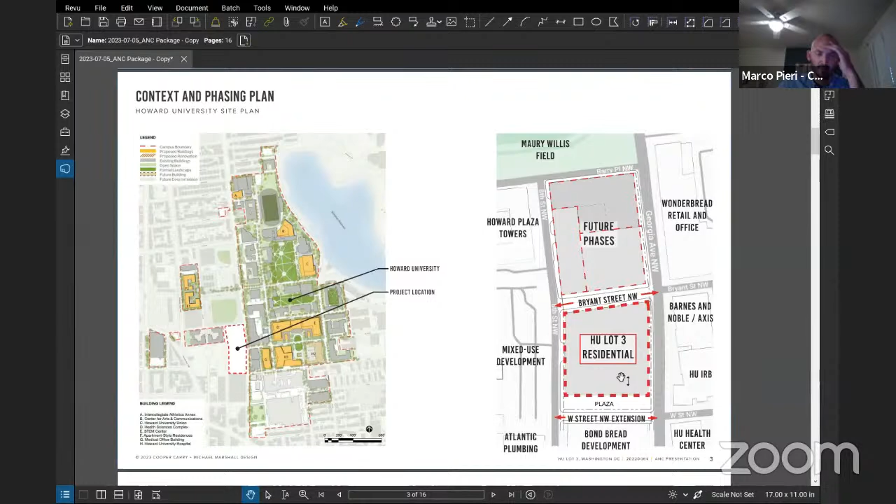At the center of the site, the Bond Bread development is going to be creating a W Street extension from the east to the west. Just to the left there's another planned development, and across the street we have Barnes and Noble, the Axis Dormitory, Howard University Interdisciplinary Research Building, and to the north, future phases.

Jumping to the next slide, I wanted to start with describing the building overall. This is a view from the southeast corner of the site, from Georgia Avenue looking to the northwest. You can see here there's no porosity, no connection through at W Street.

It's currently a large Howard University parking lot. What we're proposing is an 11-story residential building with 11 stories above grade, 2 levels below grade for underground parking. On the ground floor it's primarily retail uses with residential lobby, loading dock access, parking garage access, and other egress pathways.

The same slide, shifting to the rendering at the southeast corner. This is just showing the park or plaza that's going to be a private plaza on our property, but it will be open to the public at the south edge of the site. W Street will be running from left to right in front of you here. This shows you the overall massing of the building.

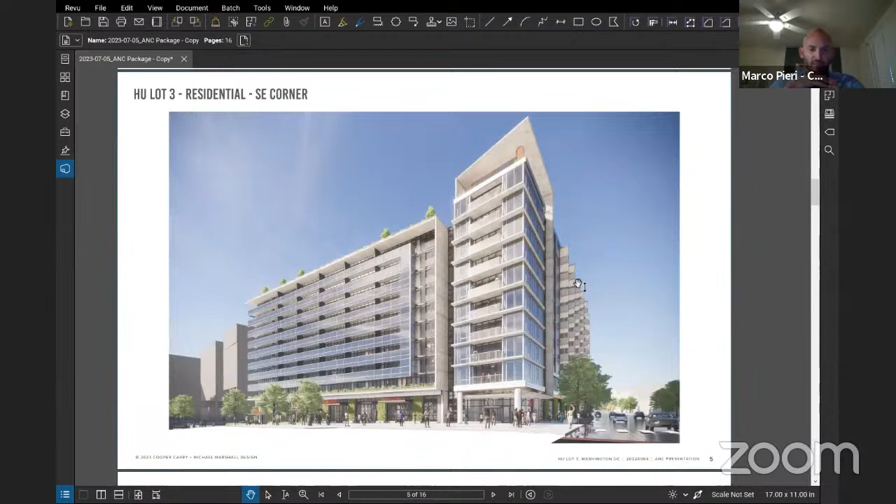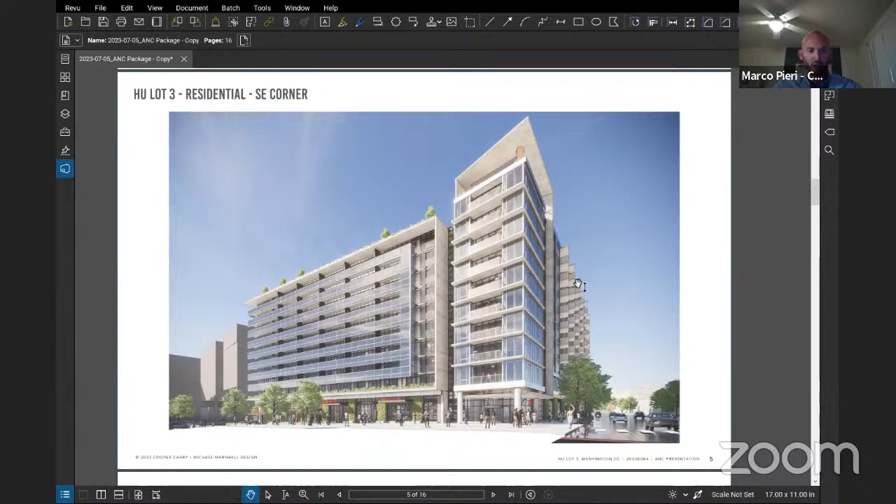We're really focusing a lot on the pedestrian realm and creating a lively, energetic ground plane with a lot of porosity and movement that we're trying to accommodate, as well as spaces for people to gather and meet.

I'm highlighting the bottom right because we're actually bringing some retail and residential lobby together to activate the ground plane at the southeast corner of the site. We have at the plaza to the south a retail elevator that will take you down to the retail parking spaces at level P1.

As we move around the west edge of the site, in the blue arrow, the first one mid-block, you'll see this is a loading dock, internalized loading. We're proposing a curb cut here to accommodate trash, recycling, and move-in trucks, all able to turn in, turn around, and do all the unloading inside of the building.

Just north of that, you could see a curb cut for the 2 levels of underground parking. Some of those parking spaces will be for retail and/or for the public, as well as the remainder being for the residential building itself.

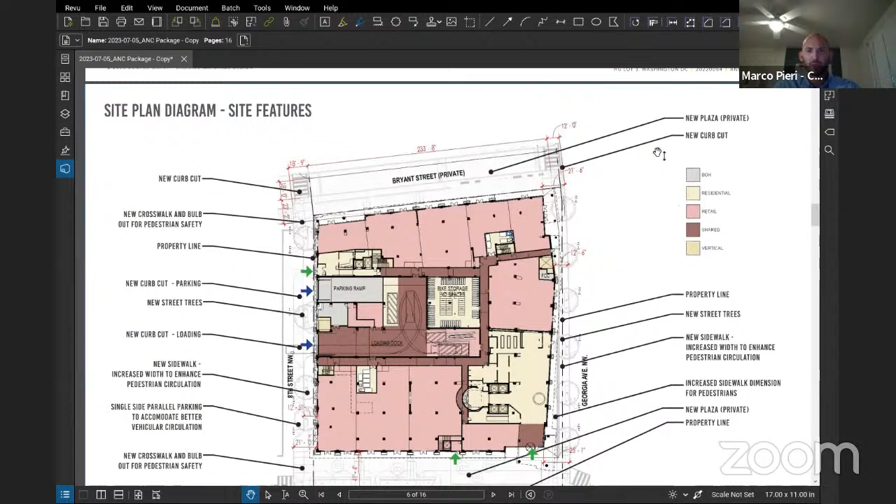Finally, one of the things we wanted to highlight is 8th Street Northwest currently has parallel parking on both sides of the street. We're proposing that the west side of the street would not have parallel parking, but it would be a two-way street with parallel parking, a few spaces on the right side adjacent to our site. Finally, curb cut at the northeast, as Layla described, connecting Bryant Street, and then at the northwest connecting Bryant Street on both sides.

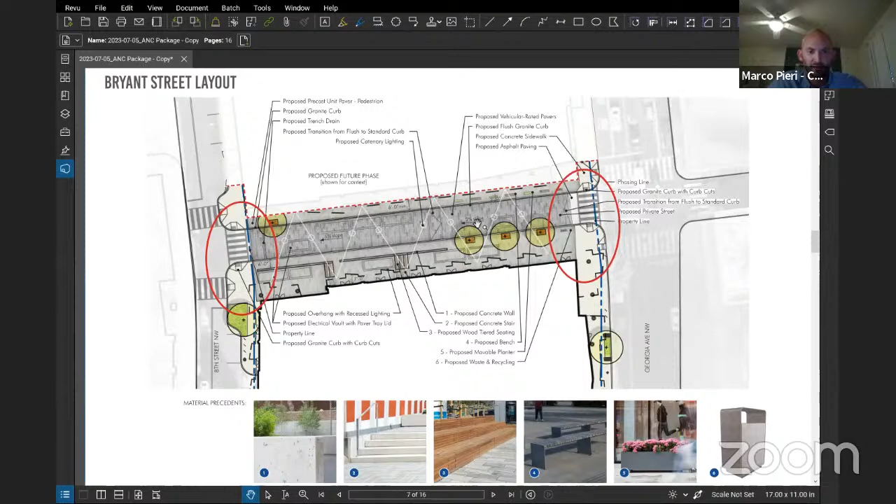Moving to the next slide, I'm just re-highlighting some of the things you've seen in our submission. These are some from the landscape architects showing the street paving patterns and those new crosswalks, as well as the actual street paving colors and design to a greater level of detail.

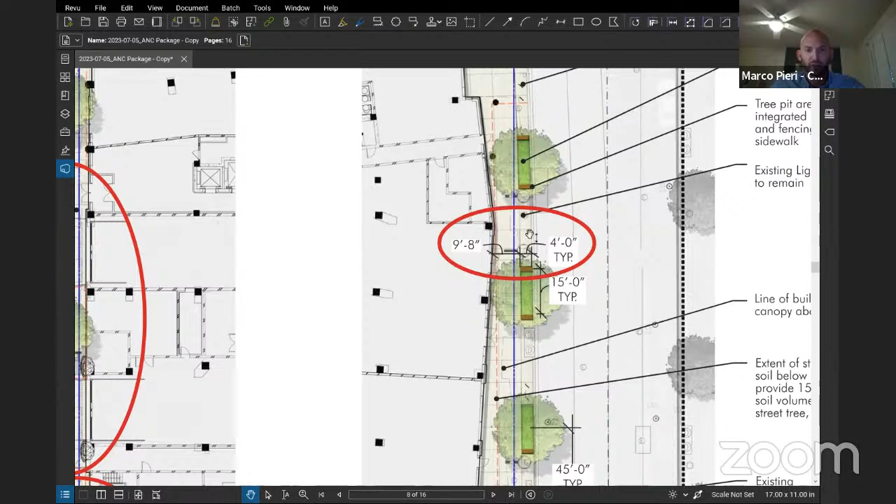As we move to 8th Street and Georgia Avenue Northwest, I just wanted to highlight the pinch point here, 9'8" width. It gets a little tighter right at that point, but it maintains 8 feet wide. Then it opens up to the north and the south along Georgia Avenue.

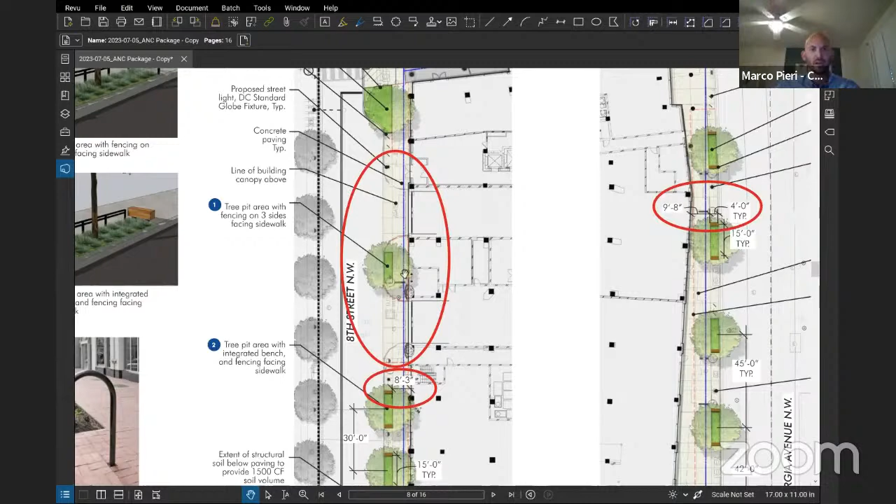Again here at 8th Street, you can see there is a continuation of curb so that as the pedestrian is crossing the loading dock and the parking ramp, they can kind of see and get to a place of safety. We didn't want to create too wide of a loading dock, but we wanted to continue that streetscape environment by having an additional tree and things like that, so it feels very vibrant. On the south edge of the site, here's again this bulb-out at the southwest corner, and at the southeast corner the crosswalk will be slightly adjusted to align with the future corner of the building.

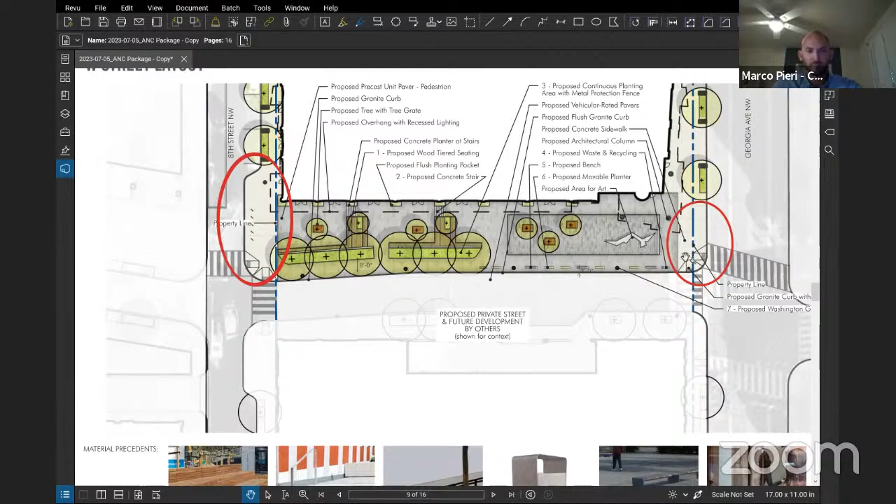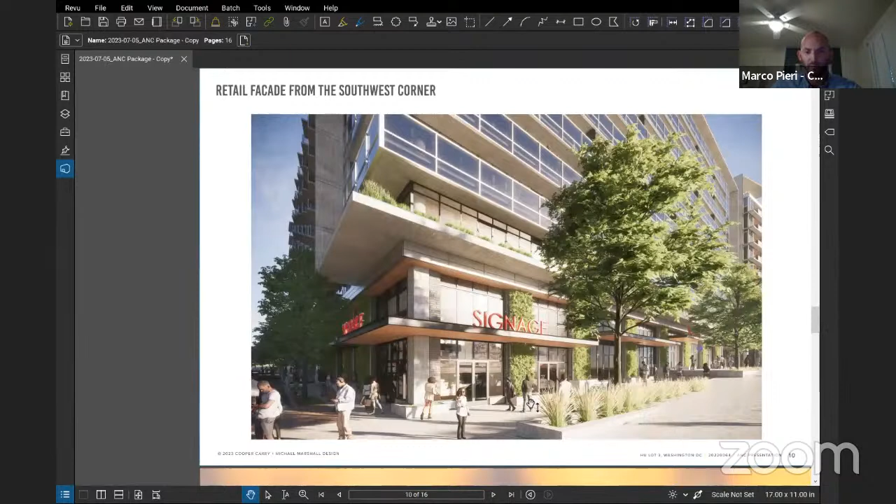Here's an example from the southwest corner of the site of some of the retail spaces and retail canopies, just to give you an idea of the vibrancy and some of the architecture and how it's going to relate to the public plaza in front of the south edge of the site. We wanted to keep a very vibrant space and really accommodate people to come and stay there multiple times of the day and evening.

So to jump towards the building exterior and projections, we also submitted an exhibit that showed all the projections along 8th Street Northwest as well as Georgia Avenue. I've highlighted a couple of the prime locations where we could show this on the exterior of the building. We'll start with 8th Street Northwest.

So along this edge, this is a typical level above looking downwards. You're seeing a couple of the balconies that do project beyond the property line along 8th Street and then onto the private property to the north. I've highlighted the depth at which those project outwards. At this northwest corner, there's a balcony at levels 3 through level 10 that's projecting approximately 3'6" out to the west over the sidewalk below.

Below that, at 12 feet above the grading, we have some retail canopies that are going to become signage band locations and canopies to protect people coming in and out from the elements at the retail zones. That canopy at a lower elevation projects out approximately 2'10". These balconies along the west side are a repeating angular form that mimics the architecture of the building and the angle that Georgia Avenue reorients itself on the east side of the site.

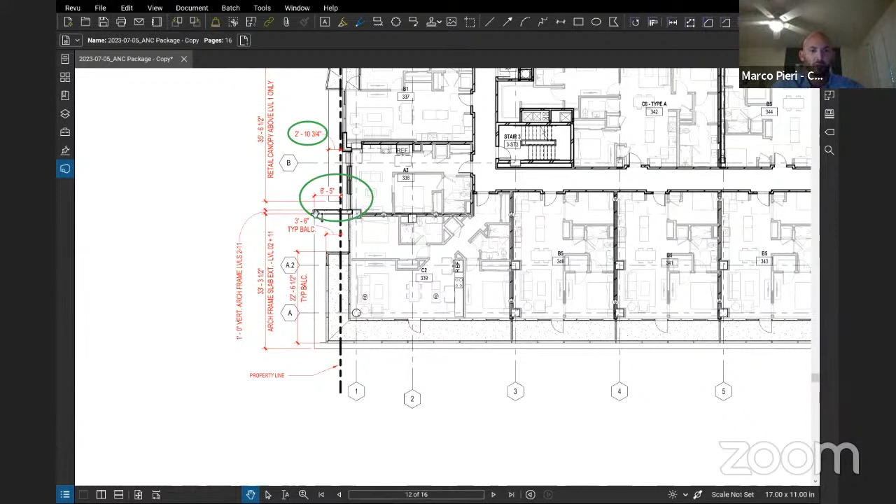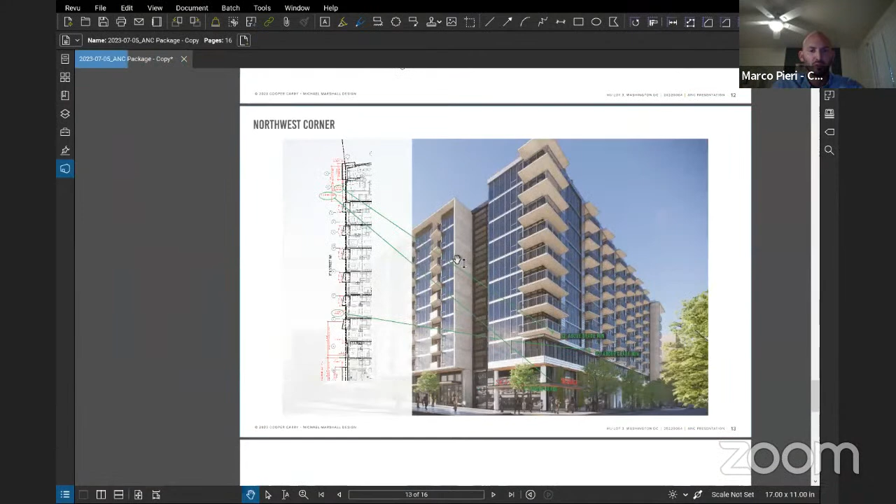I'm going to jump down to the next image, which begins to show you where those items are occurring. This is the northwest corner. You can see here the projection of 2'10" is this retail canopy below, occurring about 12 feet above grade. The corner balcony, projecting approximately 3'6", is 32 feet above grade, and it stacks all the way up from levels 3 through level 10.

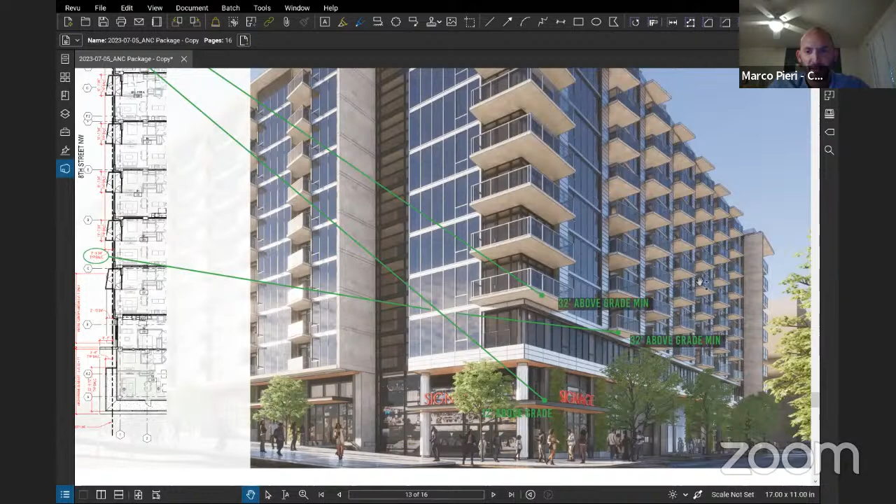The balconies to the south with the same angular articulation are also at approximately 32 feet above grade where the projections start. We tried keeping those higher so they don't impede on public space, but are more for building articulation. At the southwest corner, you can see the large concrete frame element I mentioned, intended to frame out the southern massing and create vertical bands and forms so this large building doesn't feel as massy.

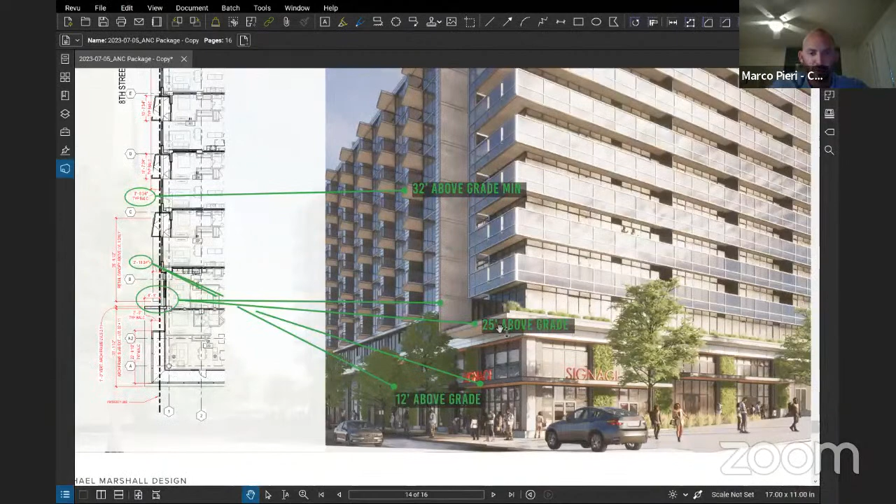This element projects out 6'10" at this horizontal plane, around 25 feet above grade. It runs vertical the height of the building all the way to the penthouse level, continuing that same profile as the horizontal plane down low.

The second zone, the 12-foot above grade canopy, projects out 2'10" beyond the property line, similar to the northwest corner of the building. Finally, we have our repeating balconies that project 3'6" across the property line, starting again at level 3. So that shows you both the northwest and southwest corners of the site.

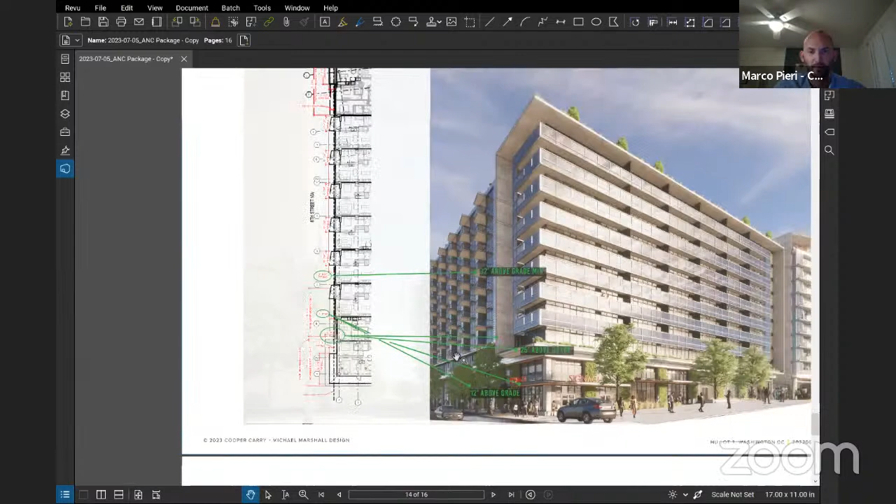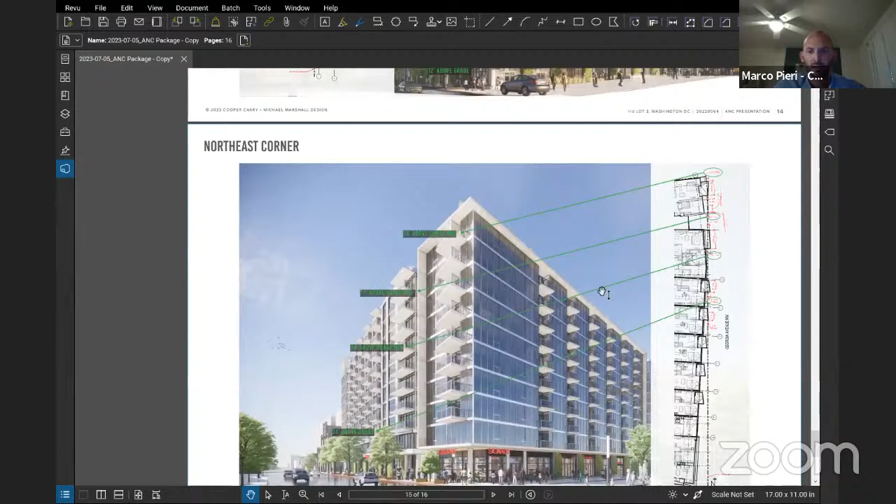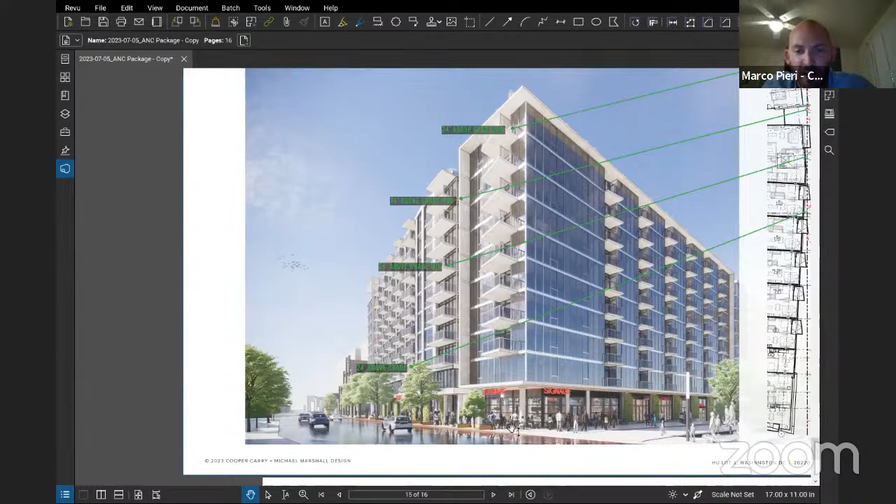Finally, I wanted to highlight the northeast corner of the building. On this diagram to the right, the property line is pretty close to the edge of our building, so we only project over it on a few balconies because the overall massing, due to us trying to open up the street pedestrian plane, turns back away from the street in order to bring pedestrians down to the public plaza at the edge of Georgia Avenue and W Street, and the same thing happens at the northeast here.

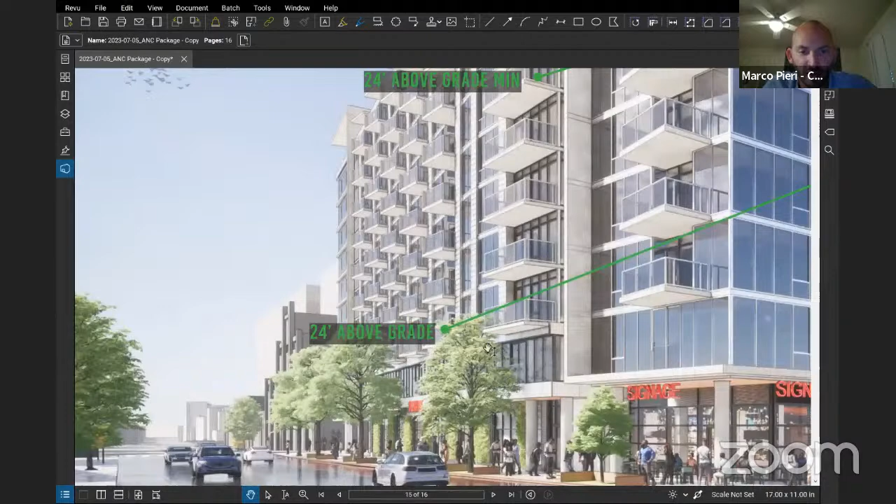The balconies here: this one projects 2'3", then that number decreases to 10 inches, and then it's fully on site for the balcony further down. Those occur again at level 3 and above, approximately 24 to 25 feet above grade on this side of the site, depending on the grading.

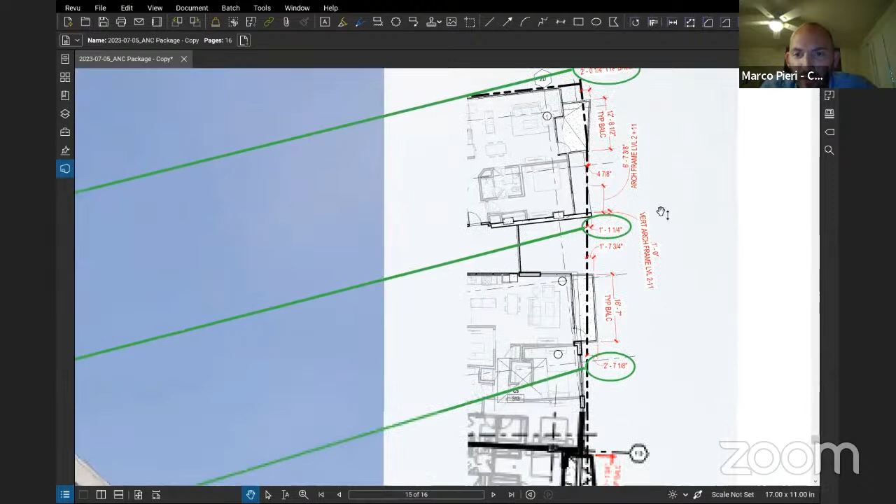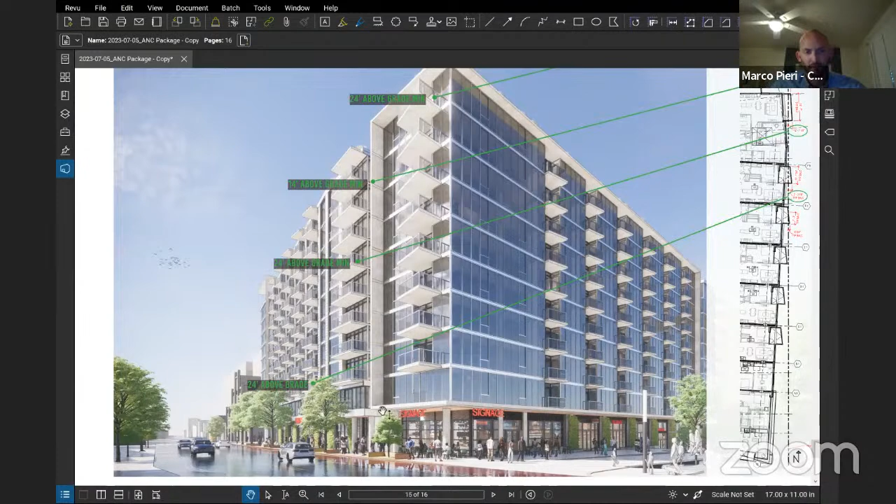At the northeast corner, we have a balcony projecting just 2 feet across the property line, right at the edge. The other side sits only 4 inches across the property line, and this vertical frame element just clips the corner of the property line. Those elements sit approximately 24 feet above grade at this lowest level. This concrete frame element sits about 14 feet above grade, where it comes across the property line by about 1 foot. That's the final slide I had to go through.

I'll hand it over to Mr. Solomon to finish up the portion related to parking and access.

Thanks, Marco. Good evening, all. Daniel Solomon, a transportation planner and principal with Gorove Slade. Marco already gave a great overview of the project, so I just wanted to spotlight some of the transportation highlights of this project.

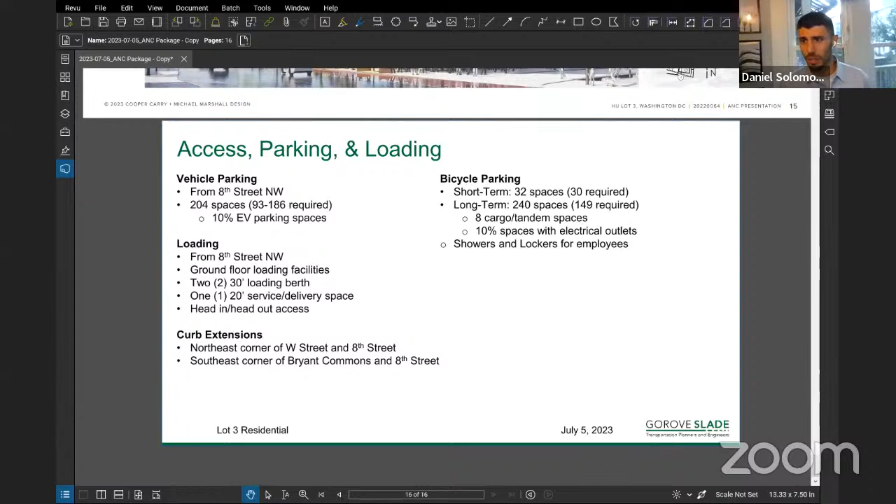Vehicular and loading access will be from 8th Street, with both curb cuts meeting DDOT's design and engineering manual standards for width and spacing. All loading will be head-in, head-out from 8th Street, also in line with DDOT standards. Bicycle access is primarily envisioned to take place via 8th Street as well, connecting to the long-term bicycle rooms on the ground floor and in the garage. There will also be short-term bicycle parking spaces along the perimeter of the site.

Regarding parking, there will be 204 vehicular parking spaces located in the below-grade garage, which meets zoning requirements. Loading will be accommodated by two 30-foot loading berths and one 20-foot service and delivery space, meeting zoning requirements.

As mentioned, all loading maneuvers will be head in, head out through public space, in line with DDOT standards. There'll be on-street parking on the east side of 8th Street, and the project will provide curb extensions at the northeast corner of W Street extension and 8th Street Northwest, and at the southeast corner of Bryant Commons and 8th Street Northwest.

Curb extensions are a traffic calming feature that improve visibility for pedestrians at crossings and reduce the total crossing distance for pedestrians. They're a great safety feature to implement at intersections.

The project will also include 240 long-term and 32 short-term bicycle parking spaces, significantly exceeding zoning and DCMR requirements. There will be cargo tandem spaces to accommodate non-standard sized bicycles, and at least 10% of the long-term bicycle spaces will have access to electric outlets for electric bicycle and scooter charging, in line with current DDOT guidelines.

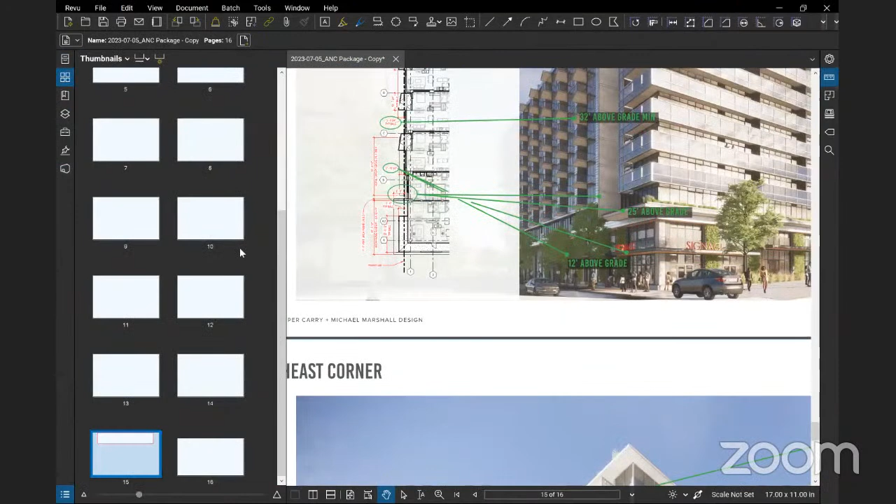Thank you, a couple of questions. On one of your slides you had the tree pits or tree boxes—can you show those again? I'm wondering a little about how they'll be maintained. It looks like you were planning to use some sort of fencing around them. Can you talk about that?

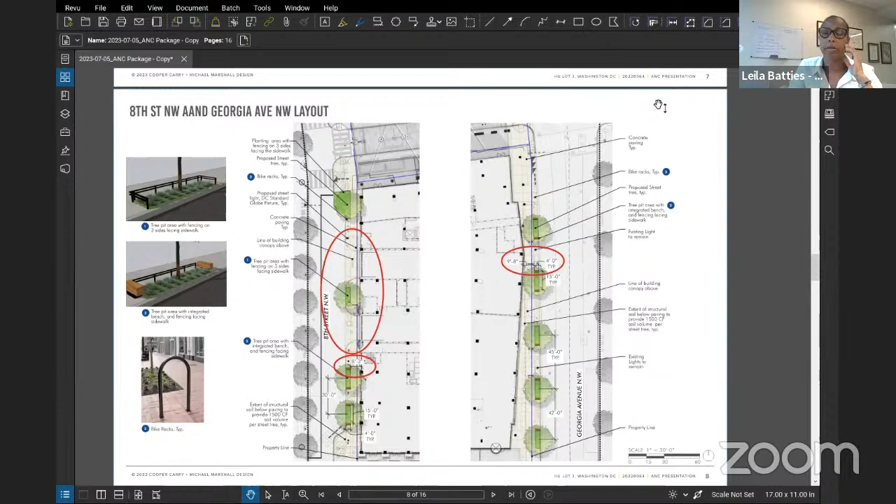Committee Member Ray, the applicant is required to provide a maintenance covenant for the improvements in public space. Okay, very good—well, that solves that problem.

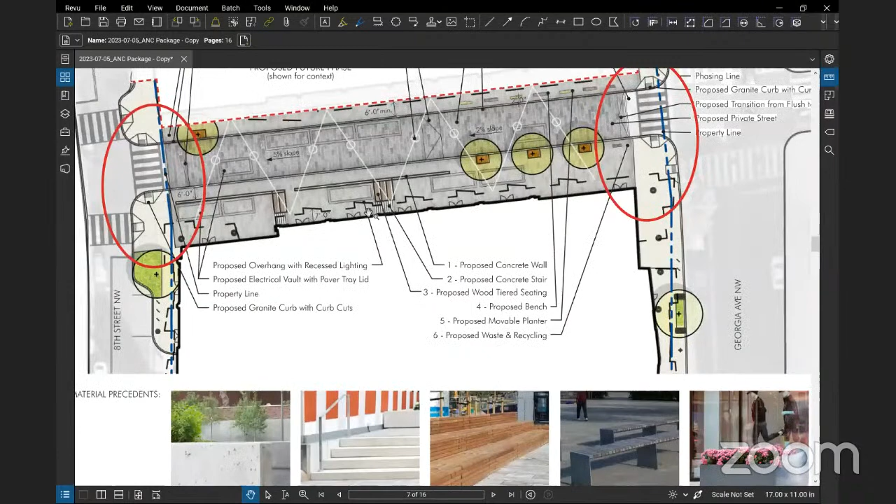On the plaza itself, would the grade in the public plaza be all the same? Is that the intent, or will there be curbs and a difference between where vehicles can go and where pedestrians are, like at a sidewalk level? Does that make sense, what I asked?

To answer that, the plaza at the north along Bryant Commons will have a 22-foot right of way at the center, what we're calling Bryant Commons, which will actually be Bryant Street. The grading does transition down—let me highlight here to explain the break. At this portion of the site on the northeast, we have a grade drop of approximately 8 feet down.

So there's actually a ramp up here, a curbless section with elements that would protect pedestrians walking along the north and south edge of the site, placed along the edge. That's so when this is closed down, we wanted to create a really minimal slope at this zone, so it could be a place where people could gather and stay, versus a consistent slope across the site that doesn't accommodate places for people to gather.

And then you can see here, there's a couple of zones that have flat patio spaces outside of the retail zones that accommodate people to stay, where there's a slightly steeper grade, 5% slope, at the western edge of the site.

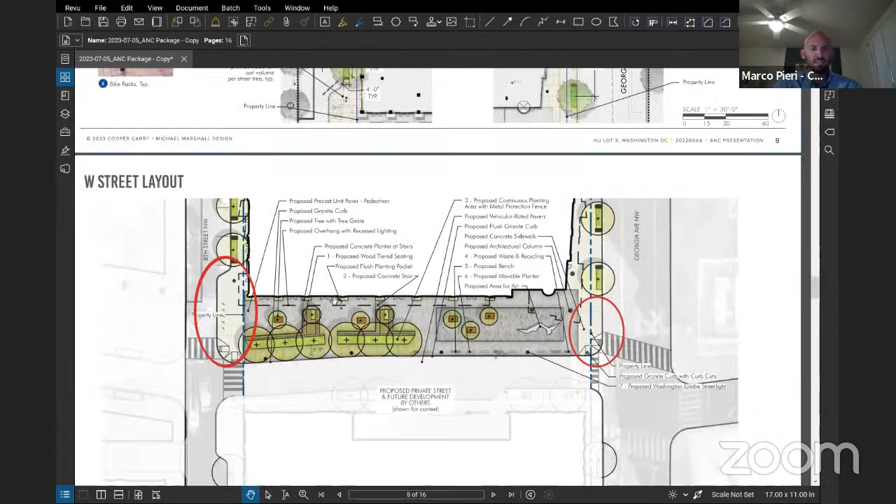And the south edge of the site had a similar design. We focused more on the plaza itself north of the future W Street that's going to be built out by Bond Bread, but it's a similar concept. We wanted to create a flat pedestrian plaza at the southeast, and then two separate zones that shift down the street along a steeper grade.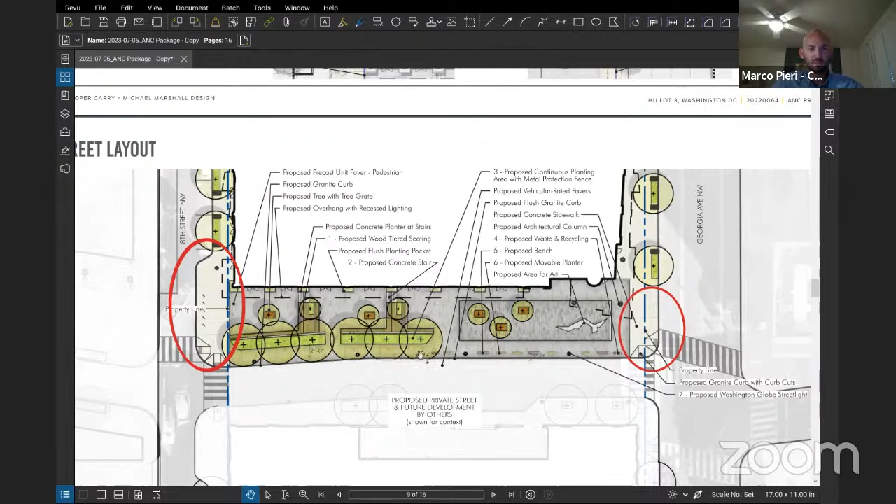Okay. Is that helpful? It is. And I don't recall if you guys are the same development team as the Whole Foods Plaza area, but that's a different developer. It is a different developer.

Okay, because that one tends to fill with a lot of vehicles, and I know that's not the intent here. So just trying to visualize, would it be possible, or is there any way to close the street when you wanted to keep it just a pedestrian zone?

Yes, I think that's a long-term plan, to have programmed elements and be able to close the street for events such as Howard's Homecoming, if they wanted to close down the street, or for other programmed events.

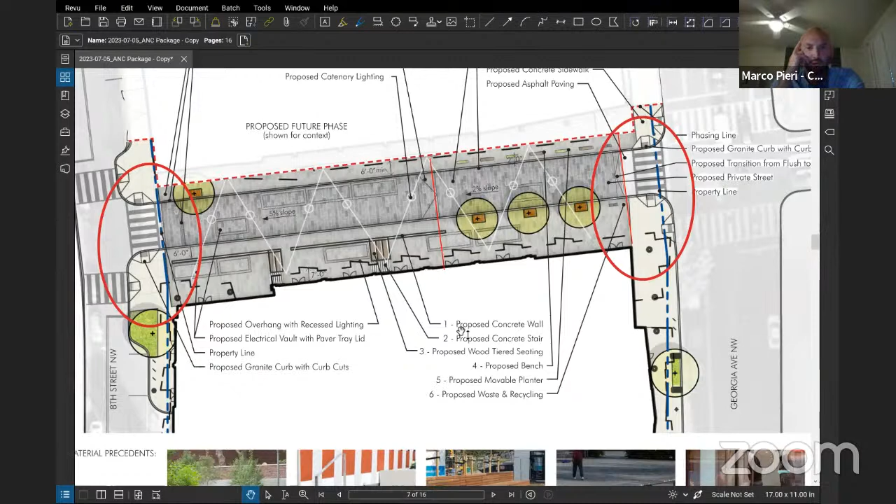It would be helpful to build something into the infrastructure that would let you do that more readily, is one thing I'd suggest. That's a great comment. Yes.

If bollards could be placed in positions that would close the street up. One issue we have with open streets along this stretch of Georgia Avenue is that we have to place a police officer at every intersection, because otherwise you can't keep people from going through. So again, this is something to think about.

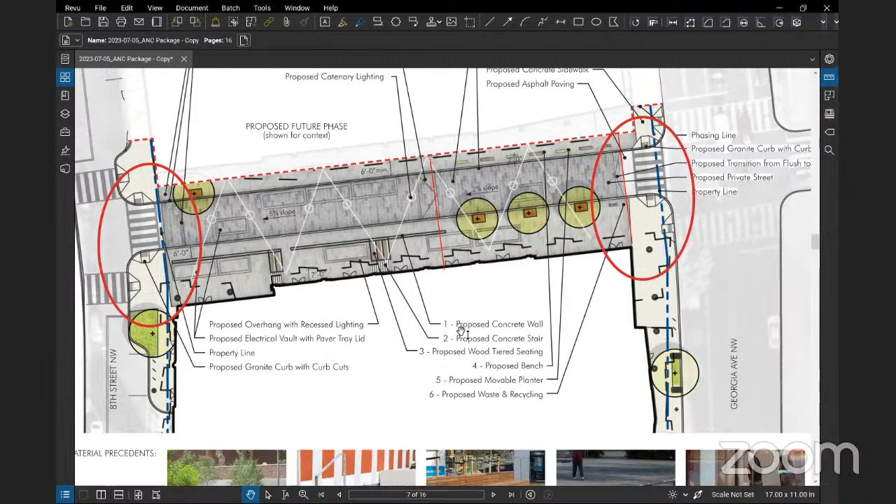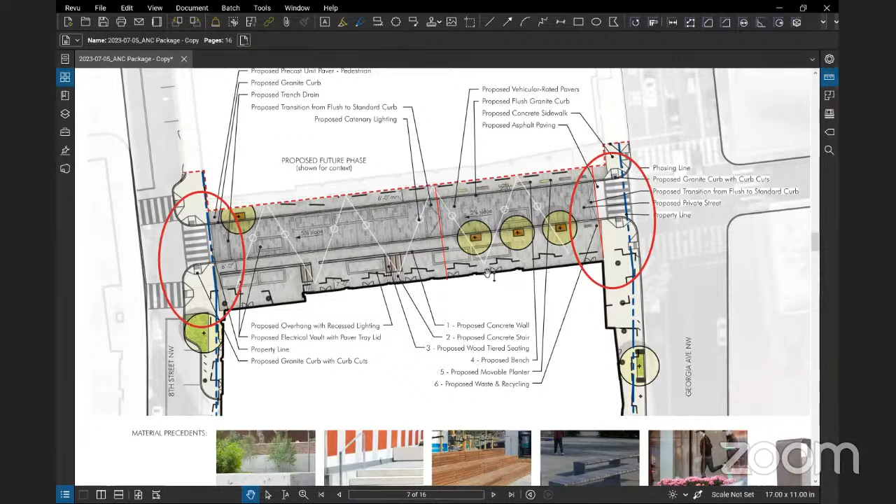And finally, if you could talk about the sidewalks and how the commercial spaces would interact with them, with the cantilevers over them. Talk about how future businesses would be able to use those spaces. Let's say if it was a restaurant or cafe, is the intent to have outdoor seating, and how do you envision that working, given that some of these sidewalks are not particularly wide?

Yeah, I think certainly the north edge of the site and the south edge lend themselves better to accommodating outdoor seating groups, because we're creating an access path along the north edge to walk by, and the south edge is much wider to accommodate these outdoor seating zones.

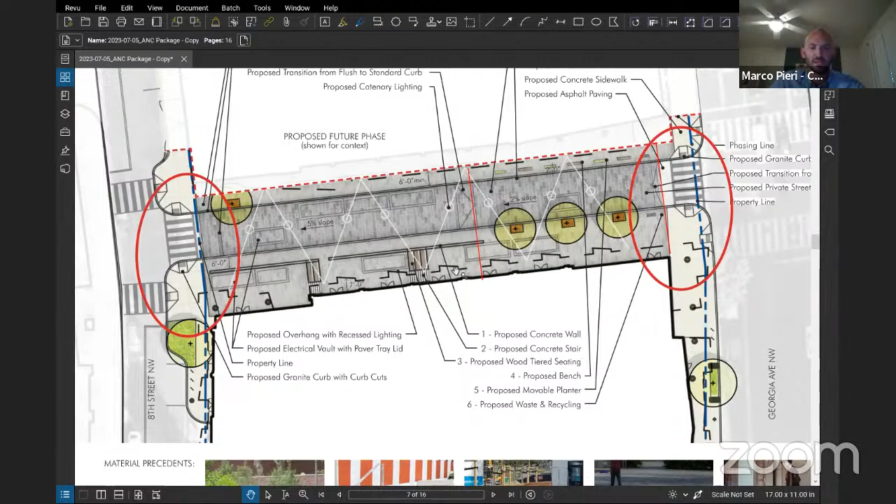If we go back to the overall floor plan, the pink zones are the retail. We've been envisioning future retailers, and while I can't predict what they'll be, we anticipate restaurant zones would more likely occupy spaces that accommodate outdoor seating at the north and south edge of the site, versus the west and east side where the sidewalk is being proposed as wider. I don't anticipate outdoor seating going into the public realm and pinching down zones that are already tighter.

Okay, thank you. Committee member Schaaf, did you have any questions?

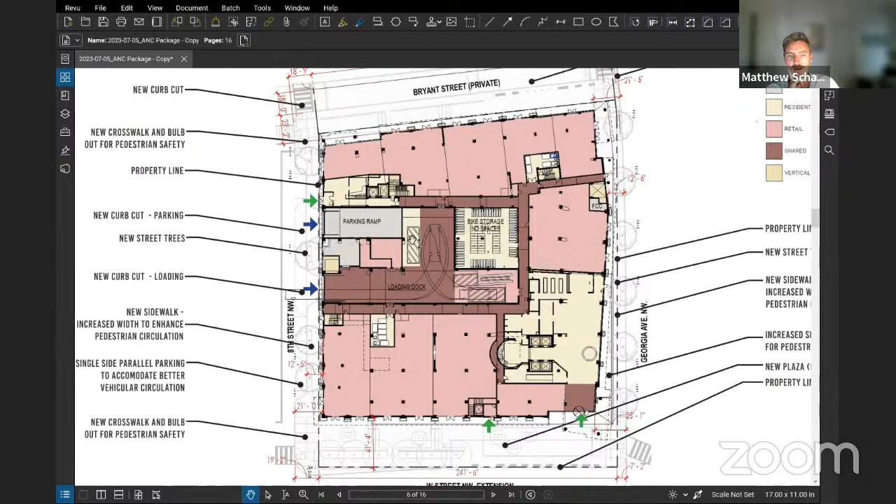Yeah, so I did continue on the questions about Bryant Street. Commissioner Ray had raised W Street around Whole Foods, so I was curious: is the concept of Bryant Street that it would be sort of the shared street style, in accordance with how the district defines that in its standards?

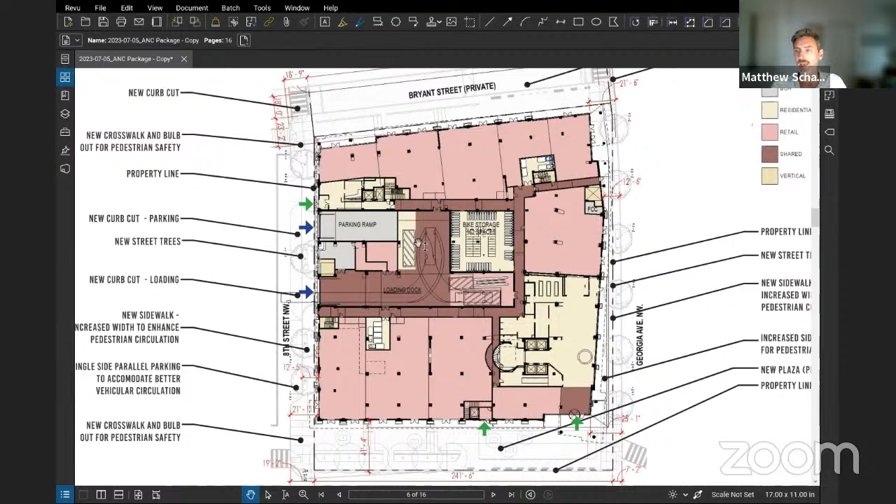Shared street. Oh, go ahead. So, are you asking if it's going to be constructed to the district DDOT standards? Is that the question? No, if it would just be akin to that style of space, and how you are viewing people and vehicles moving throughout it.

Oh, okay. I don't know, Marco, if you have a response to that at this moment, but it is intended to promote both pedestrian and vehicular access at this time.

We really wanted it to create vehicular access through to create porosity for the block and the street, but we anticipate it being kind of a slow drive through, and very comfortable for pedestrians to walk through and feel like they're connected with the space, but something like a moment of repose from busier Georgia Avenue through the site.

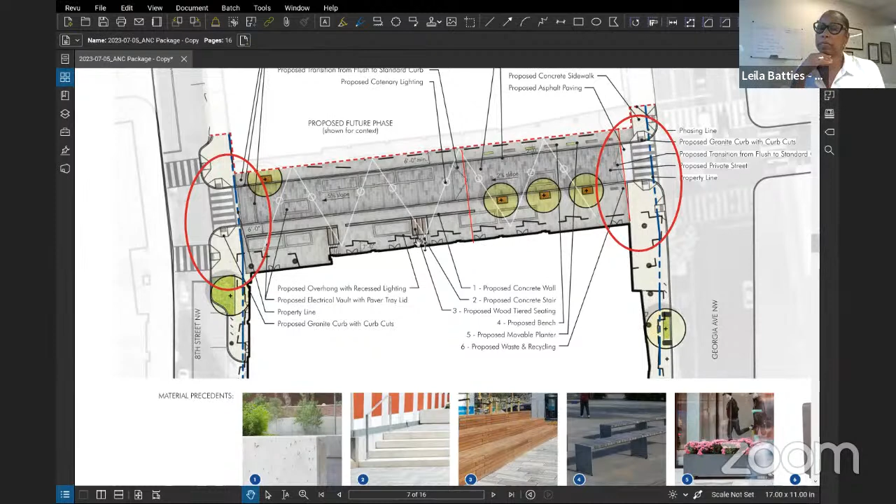Highlighting the pedestrian environment is our goal. Just by way of background, for the committee members who are new, both this Bryant Street and W Street extension are improvements that Howard negotiated with DDOT in connection with its campus plan, so they're not really specific to the redevelopment of the site, but go to a larger discussion about connectivity between Howard and DDOT.

Thank you. So are there design elements oriented towards discouraging vehicles from driving too fast or doing other things that pose a safety risk to the public on that Bryant Street, I guess is the question.

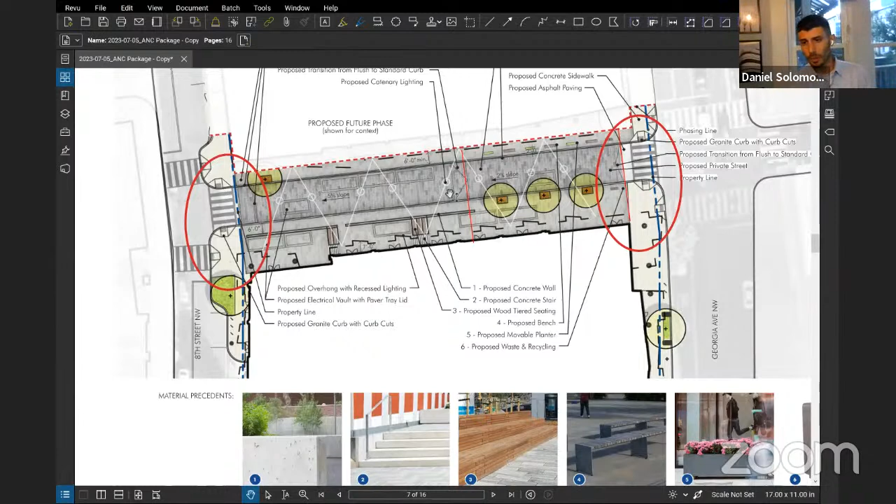The traffic calming would probably be like paving. You can think of it almost like an extended speed hump or speed bump. We use speed tables in other projects similarly, and you also have the tactile nature of the paving here which will feel different to a vehicle. A combination of those two is really going to be your main traffic calming measures, as well as visually turning onto Bryant Commons - it's a roadway that's only as wide as it has to be. And then you have all these other elements in there to kind of visually slow down any vehicle going through there.

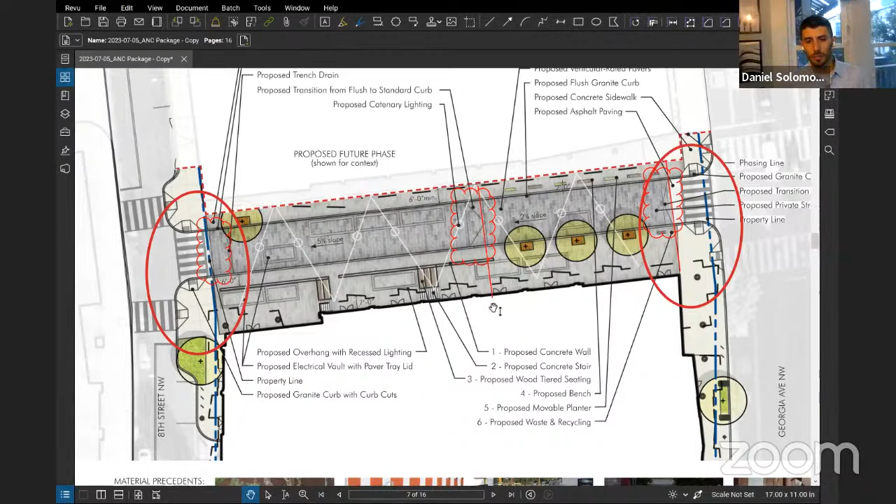It's also not really meant for cut through traffic. We want porosity, DDOT wants porosity, but it's not being designed in such a manner as to encourage speeds whatsoever. And as Marco touched on, it will have the flexibility to be closed as well, for those occasions where you just want to not allow any vehicles onto here whatsoever.

On the speed issue, neither is the alleyway behind my house, but unfortunately that doesn't stop people from driving ridiculously fast.

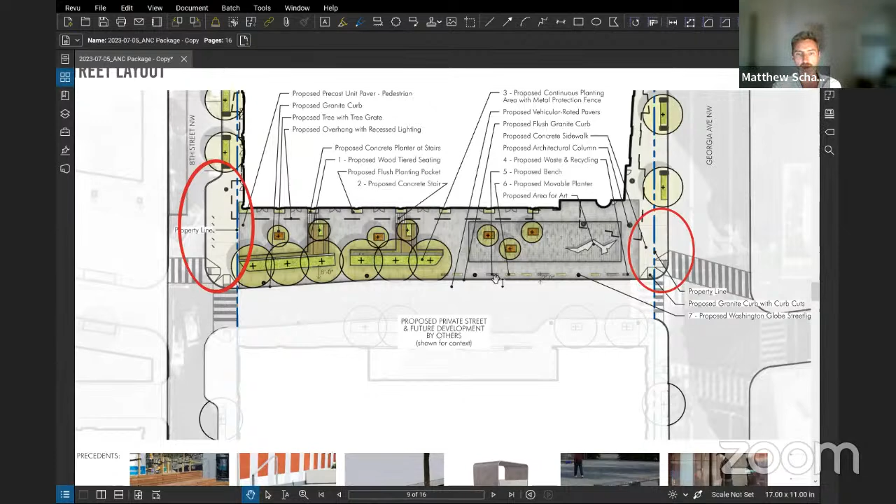Moving on, I guess this is maybe a note for the committee and potentially also for Howard's design team, that there was a proposal for 8th Street to be made one way in between V and W as part of the 8th Street transportation package, which I understand is the block below this development. But I see there are design elements here that require a certain flow, a certain design of 8th Street that could be in flux. So maybe just to put that out there - I don't have a specific question related to that at this point.

Just a note there, I know that Howard had given a comment on that transportation package before our ANC meeting, mentioning that they would prefer 8th Street to be two-way and then remove parking on the western half of 8th Street, which matches up with what they're saying here.

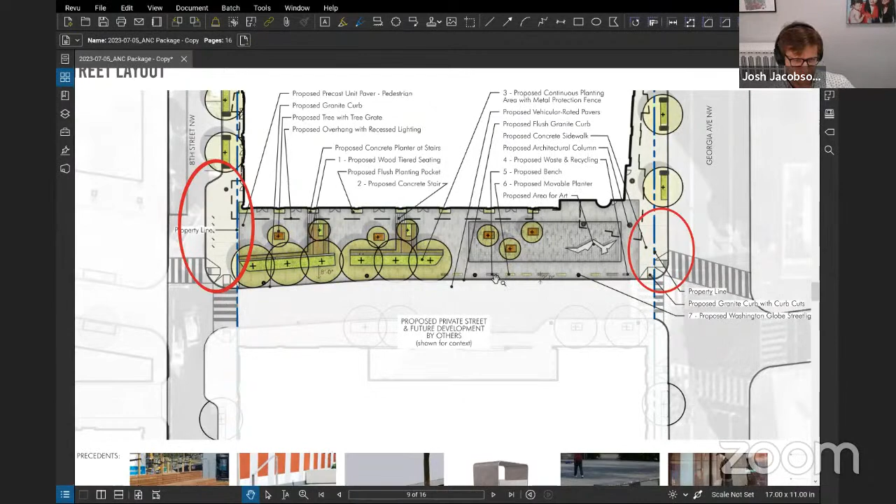Great, thank you. Going back to the width of Bryant Street in this area, is the 18 feet required by DDOT, or was there something special because it's kind of a private road? So 18 feet for - I believe the roadway would be 22 feet wide. Is this roadway 22 feet wide? So it's just following the standard of two-way travel having to have 11 feet wide lanes?

That's correct. Got it. Okay, I guess what sort of traffic calming is in here then? Because my main concern is that if there's not consistent traffic going both ways in here, it's going to be very easy for someone to - because I think Bryant is one way going east, not west, is it? It's going east one way. So it'd be more of a concern of someone picking up speed turning right on 8th Street, which wouldn't really be possible then, huh? Okay.

And then I assume, given that DDOT had included this in the negotiations, they're okay with the curb cut on Georgia here? Because I've seen them push back on other projects that have added curb cuts on Georgia, given the bus lanes that are coming. DDOT uses this as a street cut - it's part of adding in porosity where it's missing, so they're on board with this.

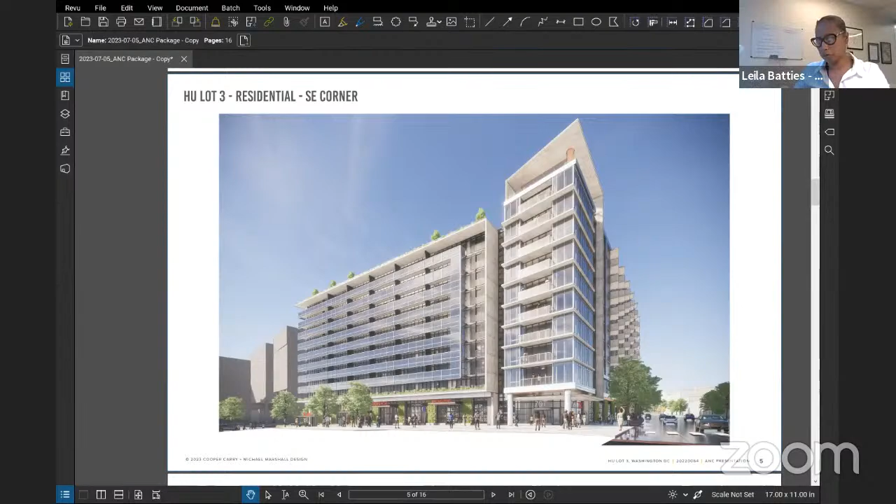Are there any other questions or comments from the team for the committee? Yes, Commissioner Jacobson. So will the committee advance this to, when is the next ANC meeting? The ANC meeting is July 26th because it's the fourth Wednesday every month. Let me just make sure. Yeah, Wednesday, July 26th at 7 p.m. Okay, and will you advance the application to the full ANC for consideration at that date?

Yes, we will definitely discuss it there. It's a question for the committee whether or not we want to advance it from this meeting, so we'll take a vote on that. I'm okay with at least the current framework, and there might be some adjustments between now and then given feedback from other commissioners. But yeah, we'll get to the voting in a minute.

Oh, okay, that's fine. Commissioner Ray? Yeah, I agree with you. We'll certainly vote here in a minute to move this along. I'm sure I'll give some thought if I have any comments or things we'd want to include in our report, but generally I'm supportive. There's no reason for us not to support the curb cuts where they are, the trees where they are, the cantilever protrusions into the public space from the balconies. There's nothing particularly here to be concerned with, but we may have some comment or try to make sure there's language in whatever the Public Space Committee approves around some of the concerns you heard tonight. But I think for the most part, everything is looking good. Thank you.